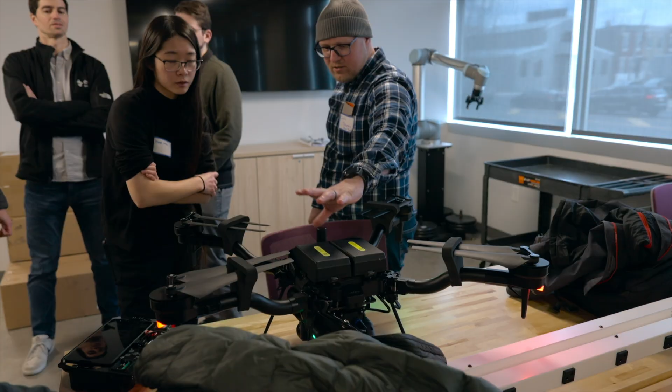When Ramon reached out and said, hey, we would like to do this event, I was like, what should my talk be about? We were discussing yesterday during dinner how impressive it is that here at Penn, we're always like 5 years ahead of what is coming. So I want to show you an overview of the things we have done, when we did it, some of the content I'm going to show. Some of you here in the room have done this work, so I'll try to give as much attribution as possible. That being said, we're gonna start.

I'm a fifth-year PhD student here at Penn. I've been here for a bit too long, so if you see Vijay today, tell him that I should graduate already.

I work on autonomy, perception, UAV hardware. Before joining Penn, I did a lot of embedded systems, but now I'm rotating into a robotic systems engineer. Previously, I was at Samsung AI in New York, it closed unfortunately, Bell Labs in New Jersey, and I also had a small consulting company.

The outline of this talk is going to be, first, I'm going to talk about GRASP and robotics in general, for some of you who don't know what GRASP is and what we do. UAV history at GRASP, what projects were done here in GRASP Lab, some current projects, future work in progress projects, and also some Q&A if we have time at the end. Let me check if I started my timer. I didn't. Good.

So what is the GRASP Lab? The best way of understanding it is that it's an umbrella lab called the General Robotics Automation Sensing and Perception Lab. We roboticists have this fixation, and I think computer science people in general, to look for good acronyms. I think this is a pretty good one.

This is an old picture of GRASP, which is quite iconic. I think the computer in the back is the ENIAC that is a couple of blocks away in the Moore building. You see here a couple of all-time geeks, and the person in the middle is Dr. Ruzena Bajcsy. She founded the lab in 1979.

Right now, GRASP is composed of 25 faculty, 137 PhD students, 265 master's students. So it's a pretty big lab. It's currently ranked second in the computer science rankings for robotics. We're head-to-head with Carnegie Mellon.

We have a lot of startups that came from GRASP, such as Exyn Technologies, Ghost Robotics, Burro, Vertiq, and KMel Robotics. So I would like to take some time and talk about Ruzena, because I think she's like a badass character in robotics.

I was reading her biography, and it's pretty amazing that she was born in the 1930s in Czechoslovakia. Her parents were murdered during the war, but she was able to go to school studying electrical engineering.

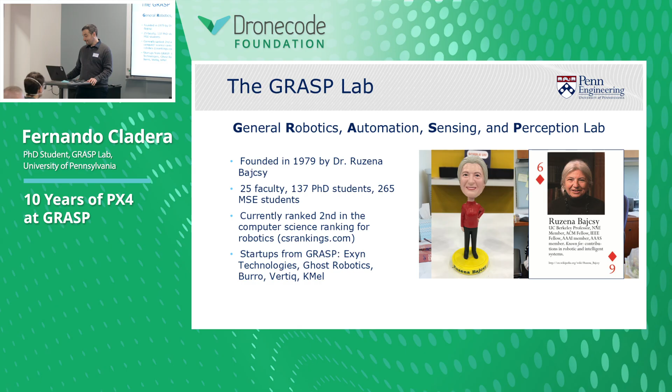We have the Schuylkill River flowing on the back of the property, so we also ran experiments with boats there. So it's a great experimental location, but we also have lab space in the main Penn campus, in the Levine building, and now in Amy Gutmann Hall.

I'm gonna start talking about some of the beginnings of how we did aerial robotics. And we didn't start with quadcopters because this was way before quadcopters were a thing.

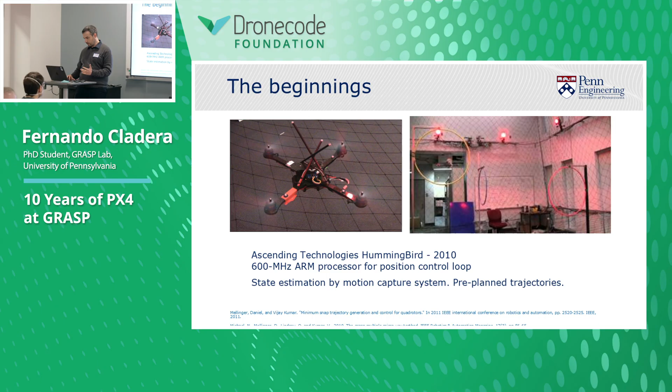Let's see if I can go to the next slide. So this is one of the clips that convinced me to join Penn, and I have here a little piece of history. So this is Alex, he worked on this.

I think this is one of the first small drones before the Crazyflie was a thing that was able to run autonomously, as you can see in these videos. They did a series of pretty cool videos, got a lot of attention, and this attracted a lot of interest into UAVs.

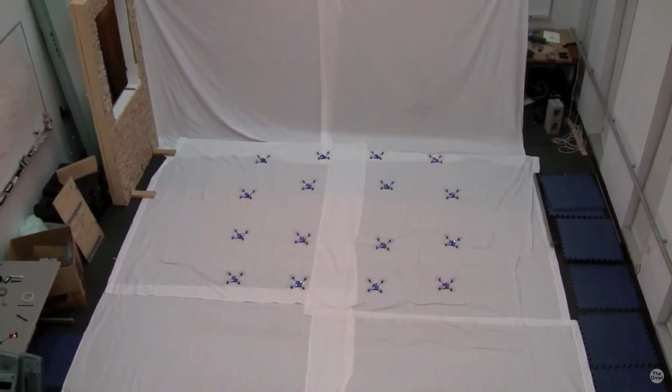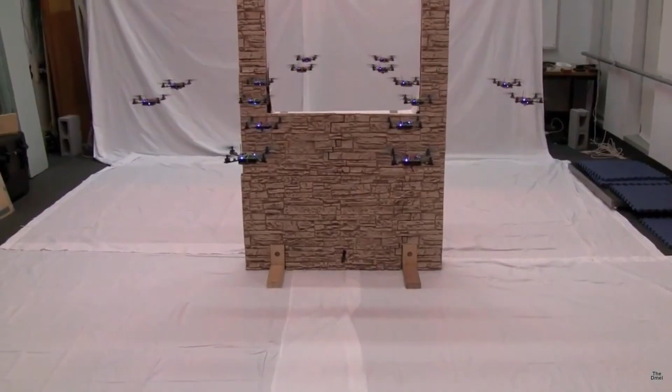But as I said, the catch with this was that they were running this in a room with these cameras, and if you want to do this in another location, you need to bring these cameras. So that is not ideal if you want to have an autonomous system.

So the next big thing was fast lightweight autonomy. This was a DARPA project. DARPA usually has challenges, for those of you who are not familiar, where they toss a challenging problem into the community and have teams submit their solutions.

They usually set test benches in really nice locations. They do it really well. And then you test your solution, and you get ranked depending on how many points you got.

So to grab the same quads that were flying in the lab and take them outside, we need to solve a few problems: state estimation, meaning where your quad is right now, what is the position and orientation of your quad; obstacle avoidance, so if there is something in front of you, you don't run into it; and also onboard computation, because you need to do all this on board—there is no radio link that can transmit information to the UAV.

These problems were solved with these three components that you may be familiar with today: VIO, LiDAR and motion primitives for obstacle avoidance, and also putting a NUC computer on top of the robot. So this was the prototype that the FLA team put together, which looks pretty much like a computer with a few props.

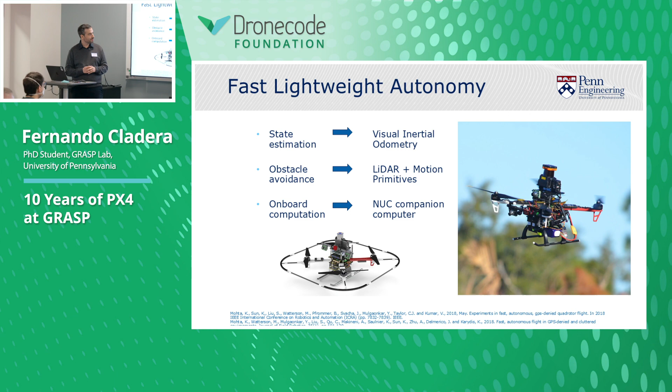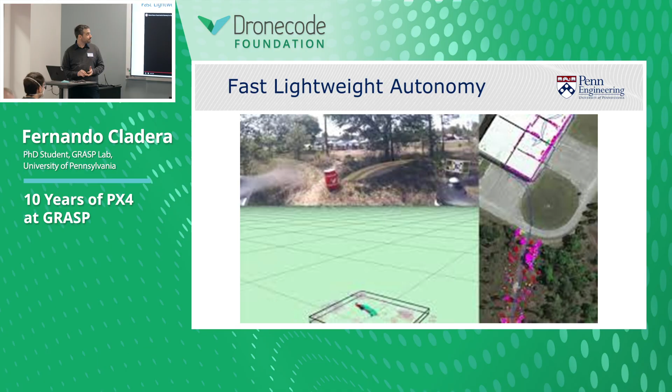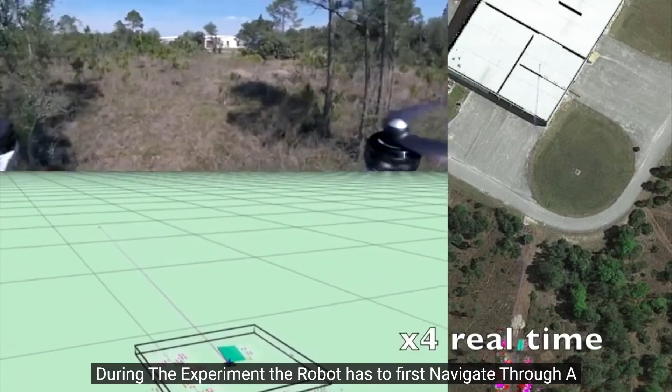They were able to achieve really good results with this. So this is one of their videos in which you can see the RViz representation, a satellite, Google Earth-like overview. You can see how the drone flies on its own, avoiding some of the trees, and they need to look for a way to enter this building.

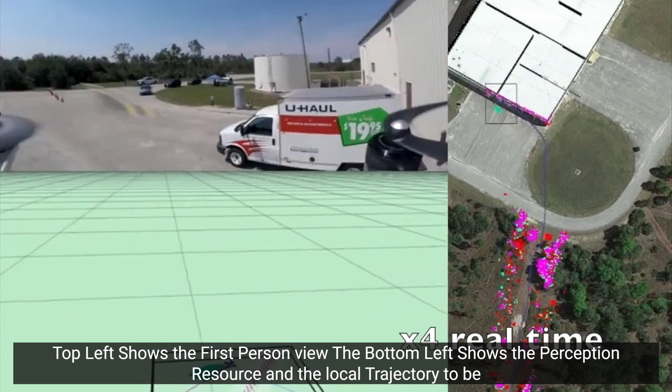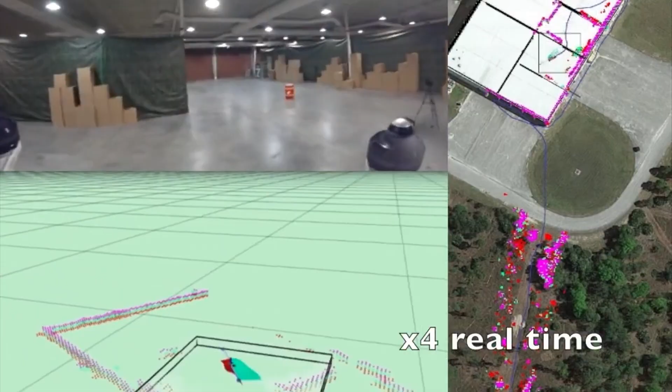So the quad first goes around the building looking for an opening. Then when it finds that one of the gates is open, it gets into the building and starts looking for one of the objects of interest. For some reason, the military is really obsessed with barrels, red and blue barrels. So here the target was one of these orange barrels.

Pretty amazing feature. This was the beginning of the autonomy stack that we use here in the lab for a lot of the experiments that we're running.

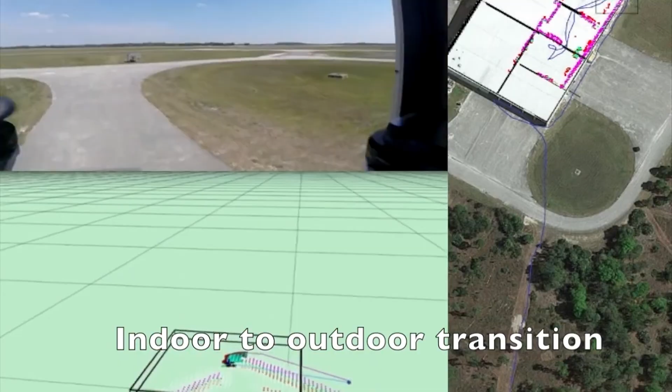Then the next goal was to scale down. We have this platform that can do all this, but it's kind of dangerous if we want to use it indoors. So if we want to be safer, we need to go smaller. This is the work of Dinesh, who is here in the room, working on these projects. I have some of these quads outside if you guys want to check them out.

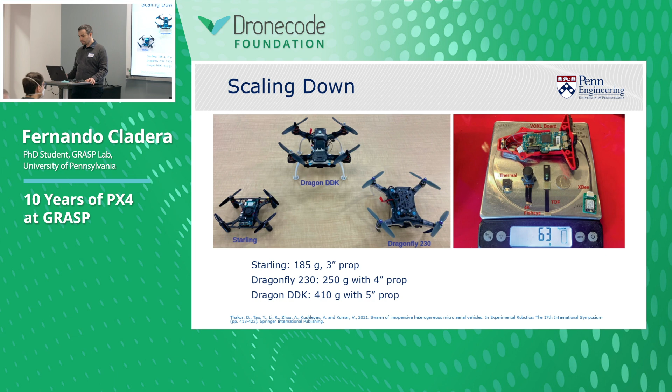So this is a very cool video of what these platforms were able to do. Compared to the previous videos with aggressive flight, in this case the platforms were using onboard state estimation to go through narrow gaps like this one.

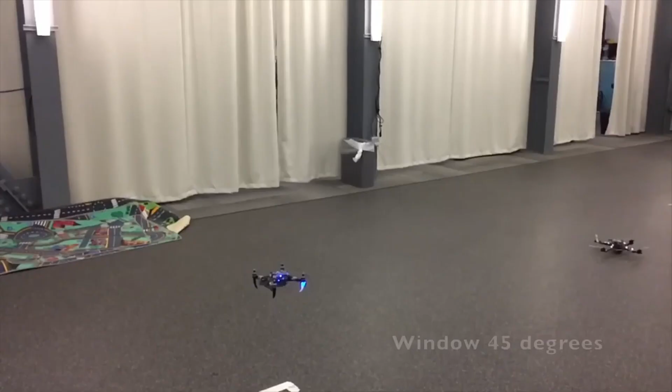Just to keep things in context, this paper was published in 2016, I think. Yeah, 2016, so it's almost 10 years ago.

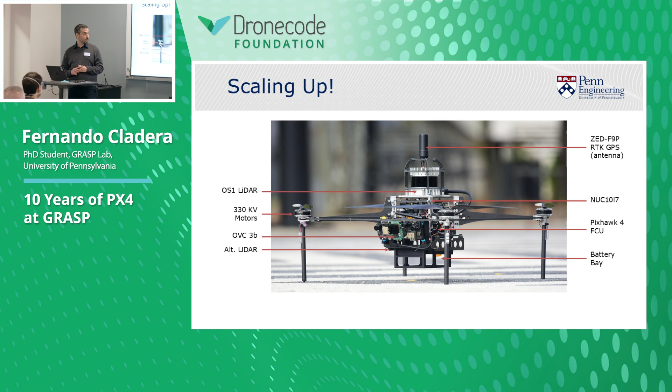But with these small platforms, usually if you want to go small, the only way of doing it is going with cameras or time-of-flight sensors. The issue is that usually the perception sensors are not as good as if you go with bigger, automotive-grade LiDARs. So we put together this platform also in-house, called the Falcon 4. It's essentially a flying LiDAR and a flying computer that we mainly use for applications in forests.

As I said, a big LiDAR is really good, it gives you really accurate depth, with range up to 90 meters, 50 meters. But the challenge is that you're essentially flying half a kilogram, more than a pound, just for the sensor itself. So for the smaller quads we have here in the lab, we rely on RealSense or PMD time-of-flight sensors to get obstacles around the quad or get state estimation.

So this quad enabled this work on autonomous flights in forest. We worked on this in 2020, 2021. This is at the Wharton State Forest, one hour away from here. And we're able to fly under the canopy, avoiding all the tiny branches that these trees have.

It was a very challenging environment because your state estimation gets messed up, and because there is undergrowth that is constantly moving. But the system worked quite well, and you can see here how the quad is finding the narrow gaps in between the trees to fly in this challenging environment.

The cool thing about this experiment is that we were also at the same time measuring tree diameters. So when you finish the flight, you have a 3D map of where all the trees that the quad was able to see were located, and what were the diameters of the trees. So this is part of an ongoing effort to do precision agriculture with UAVs, precision forestry with UAVs.

This platform also enables research on air-ground collaboration. Here you can see our Jackal platforms and also the Falcon 4 UAV. In this configuration, the Falcon is flying a high-altitude mission at around 100 feet.

It's building a map underneath in real-time. This map is a semantic map, so different colors mean different semantics: blue is road, red is building, green is trees, dark green is grass, and so on. We're able to transmit this map in real time to the ground robots so that they could plan their mission.

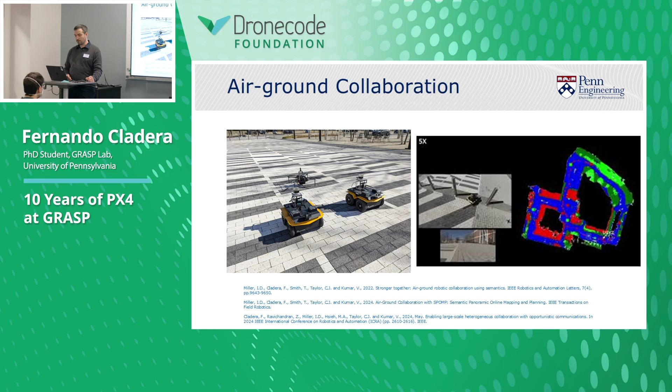One of the challenges of doing this is communication. When you're in these kinds of unstructured environments and need to communicate between different robots, there needs to be a way of having a communication system that can break and reconnect. And if a robot goes rogue, there needs to be a way that we can go and extract information from that robot so that the whole system works as a team.

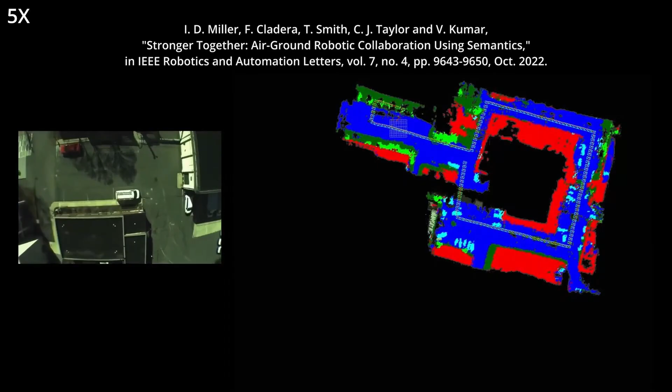So this is an after-the-fact animation that we did. Here you can see how the quad, when it changes colors, is transitioning to a mode like, alright, I need to go to that robot to pick up some of the messages that robot has produced because I haven't heard from it in a while. Let me move it a little forward.

Here you can see the quad is exploring, and then at some point it decides it needs to go talk to robot number 1. So it talks to that robot, transitions into a communication phase, does a flyover, extracts all the information, and then flies away to continue its mission.

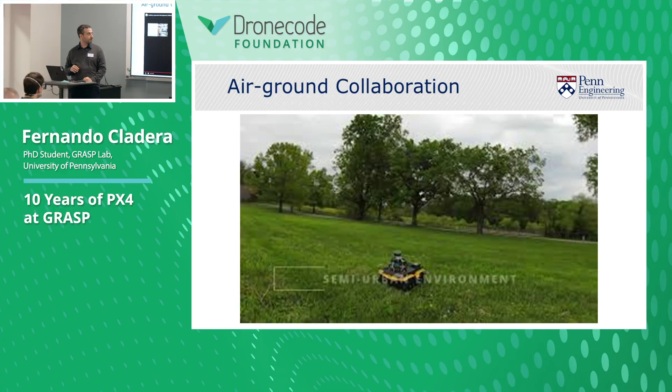Event cameras. How many of you are familiar with event cameras? I'm not going to spend much time, but the cool thing about event cameras is that they work in a different way compared to traditional cameras. In traditional cameras, we have the concept of a frame, essentially sampling all the pixels at the same time. The event camera works in an asynchronous way.

Each one of the pixels that changes is triggering an event. So instead of having frames, we have a continuous stream of events. The main advantage of this is that they are faster compared to traditional cameras, and also each one of the pixels triggers independently, so there is no concept of global exposure.

If you try to take a picture towards the sun, your phone needs to adjust exposure such that the whole image has a contrast and exposure value that is the same for all the images, and that is going to blind you from watching things that are not the same level of brightness as the sun. With an event camera, you can avoid that - you can point it at the sun and see things in the same scene even if they are in darkness, which is pretty cool.

So we put an event camera on one of our high altitude UAVs just to see what we could get that we can't get with traditional RGB cameras. This is a video that shows an experiment here at Pennovation.

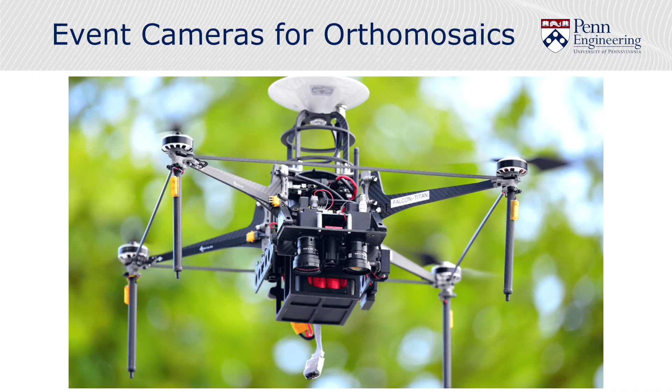We also performed flights at night or during the sunset, and we show that event cameras are able to recover a lot of information in these challenging light conditions.

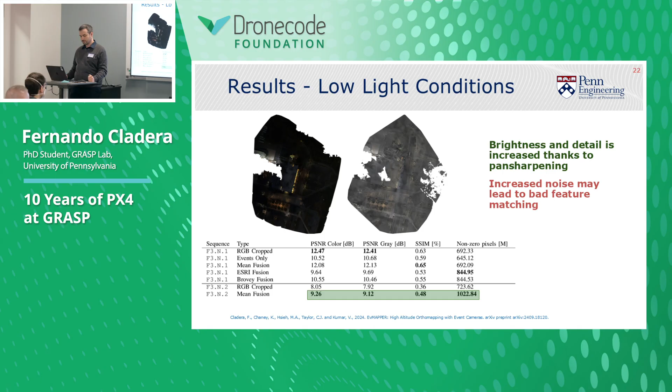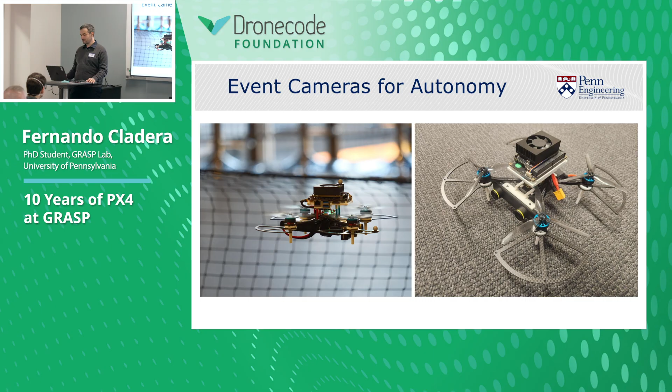But there are still some noise issues that need to be fixed with these sensors. And finally, this is another project we're working on, trying to have a full UAV working with event cameras.

Dexter here is leading this effort. And finally, I would like to talk a little bit about foundation models in robotics. I know that we're in the AI era, and this is happening for a lot of things in robotics. So these are the aspects we're looking into with foundational models: high-level specifications of missions, of goals, scene understanding, problem decomposition, depth estimation. These are things that these networks are very good at.

So for instance, if you tell your robot this high-level goal, assist in this scenario, the robot is able to plan a mission from that high-level specification and perform the mission.

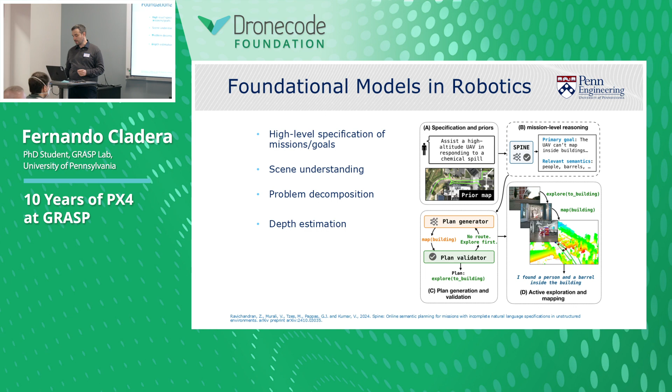And also another cool thing is using VLMs for scene understanding. So in this video, we have a high-altitude UAV that is flying, and you can see the kind of labeling that we can get from the objects on the ground. And with these labels, we can construct semantic graphs that we can transmit to other robots on the ground, so they can perform different actions.

So with this, I would like to finish, and I think that we have some time for questions. So yeah, thank you. All right, any questions?

Good. Yes, please, the event cameras. Do you know of one that's already on the market that you use as a sensor, just because I know you had some stuff listed as a lidar. Lidars you listed as actual ones you used. What different event cameras have you used?

So right now there are, I would say, two main manufacturers of event cameras. One is a company from Switzerland called Inivation. The other one is a company from France called Prophesee. They both sell sensors with different resolutions and different capabilities.

So I think that this is a very novel field, so you will have to do some exploration on what applications you want, because, for instance, for some obstacle avoidance, low resolution event cameras may be better, since there's a trade-off in how many pixels or events you can extract from the sensor if your resolution is very high. High resolution event cameras are better for mapping because you get more spatial resolution.